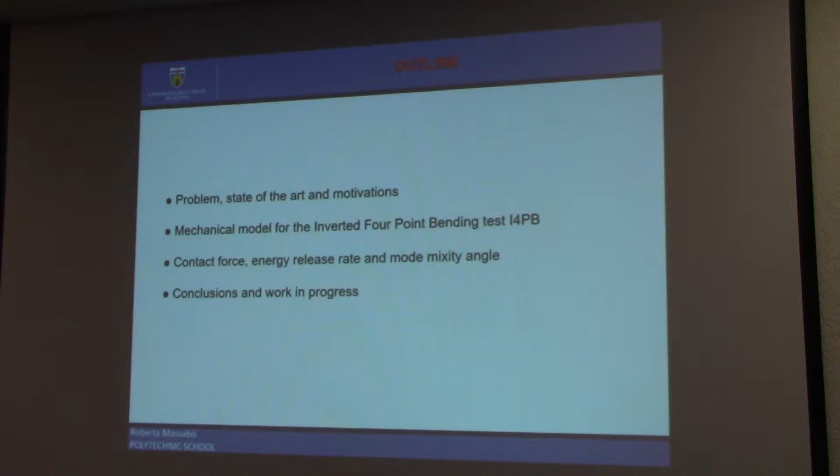So thermal barrier coatings are used in order to protect and reduce the temperature of the underlying metal alloys in aircraft and power generating turbines. And they're essentially a layered system with three layers. So we have the metal substrate, then we have the metal bond coat, which is usually very thin, and then we have the ceramic top coat.

And among the dominant failure modes is the failure mode by spallation, which is driven by interfacial delamination. And interfacial delamination typically grows between the three layers and under mixed mode condition, and usually with a large component of mode 2.

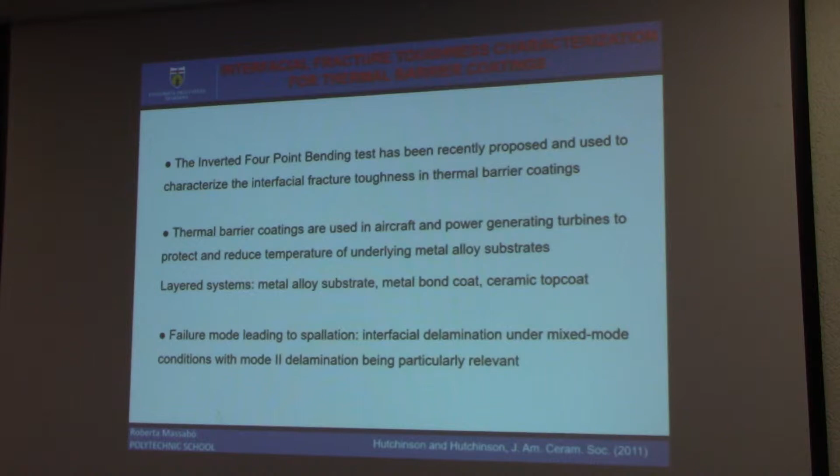Now, the inverted four-point bending test is a modification of the well-known four-point bending test, which was developed by Charalambides at Santa Barbara many years ago to measure interfacial fracture toughness in layered systems. And in this test, loads are applied this way in order to create a state of pure bending in the intact part of the specimen and in the lower delaminated arm, while the upper arm is essentially stress-free.

And the delamination in the specimen grows under steady-state condition, and the energy release rate and the mode mixity angle can be defined very easily with any methods. We applied the Suo and Hutchinson method, and they are shown here, so they do not depend on the crack length, and the mode mixity angle is around 41 degrees. So this specimen has nearly an equal mix of mode 1 and mode 2.

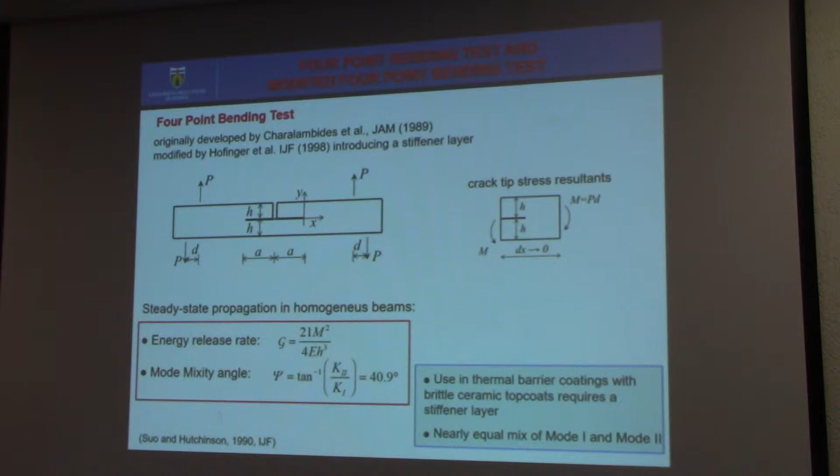It has been applied to thermal barrier coatings, but as I said, thermal delamination typically grows with a much larger mode 2 component, so it's not useful to define the fracture toughness under those conditions. So the inverted four-point bending test was suggested in a paper by Hutchinson and Hutchinson in 2011. And recently, it has been applied to thermal barrier coatings by Vaunois, a group of French researchers. And they performed experimental tests, and they also conducted finite element analysis.

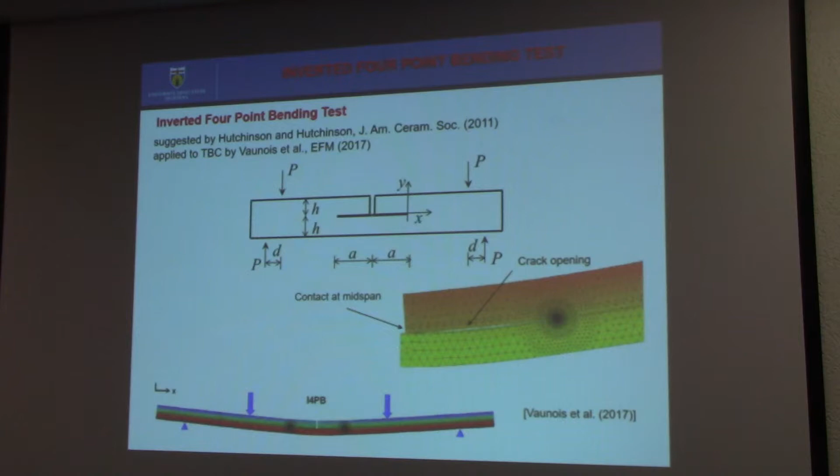Now, the idea is very simple. The loads are simply inverted in sign. And therefore, we still have a constant bending moment in the intact part of the specimen, but now the crack faces come into contact at the midspan. And from the finite element results, they observed that contact occurs only at the midspan, while the crack surfaces are open over most of the length of the crack.

And Hutchinson and Hutchinson in 2011 obtained an analytical solution for the energy release rate and the mode mixity angle. And that solution was obtained based on a number of simplifying assumptions. They assumed the specimen to be homogeneous. They neglected shear deformation. They neglected near-tip deformation, so they assumed the delaminated arms to be clamped at the crack tip cross-section. And they also assumed frictionless contact, so they neglected friction in the solution.

Now, based on this, they calculated the transverse displacement at the midspan, and imposing a compatibility condition on the transverse displacement of the two delaminated arms, they obtained the contact force. And then by applying classical methods, they defined the energy release rate and the mode mixity angle. And this solution is again a steady-state solution. Energy release rate and mode mixity angle are independent of the crack length. And the mode mixity angle is around minus 60 degrees. So you see that the mode 2 component is much larger than the mode 2 component in the regular four-point bending test.

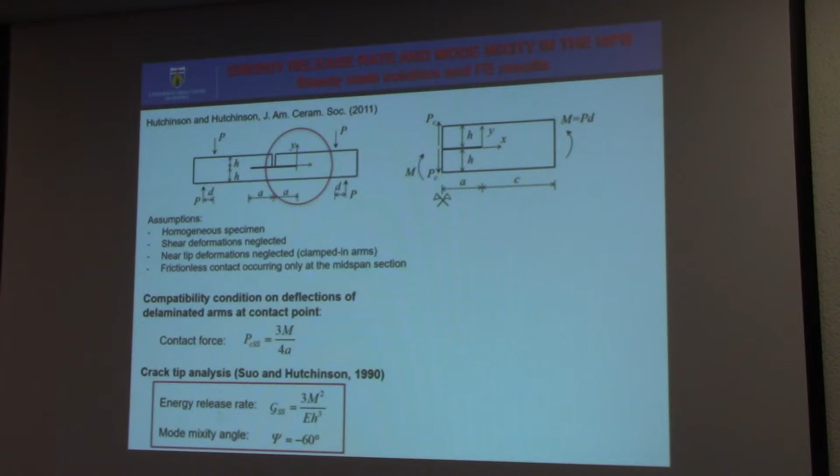They also performed some finite element calculations, and here you see the normalized energy release rate and the mode mixity angle as a function of the length of the crack. And the different curves correspond to different values. They treated the problem assuming Coulomb friction, and they considered different values of the friction coefficient.

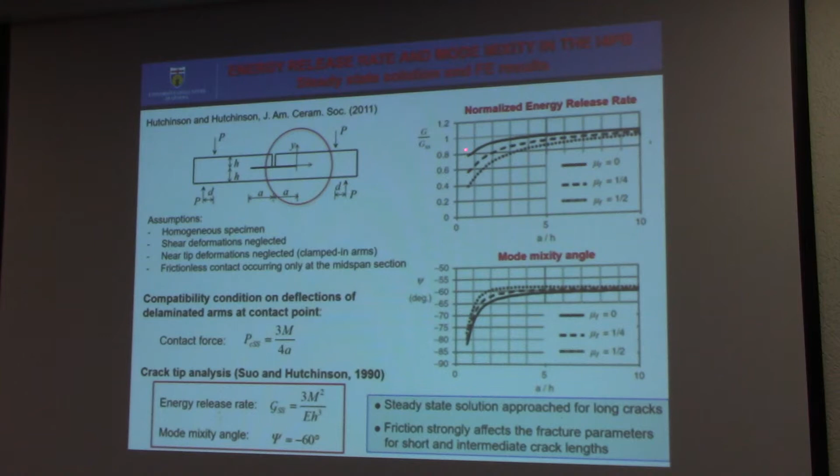And what you can see from this diagram is that it's true that the steady-state limiting solutions are approached, but these occur only for very long cracks, while the solutions for short and intermediate cracks strongly depend on the friction acting at the point of contact, and the solutions are also affected; as you can see, they differ from the steady-state solution. So our idea is to formulate a mechanical model for this specimen which accounts for all the effects that were neglected in the original solution.

So we want to account for friction effects on the fracture parameter. We want to account for shear deformations, which are important when we are dealing with short cracks. And we want to account for the near-tip deformations, which are important not only for short cracks, but also for intermediate crack lengths. So the aim is to obtain a calibration formula for the inverted four-point bending specimen, which is valid for intermediate crack lengths.

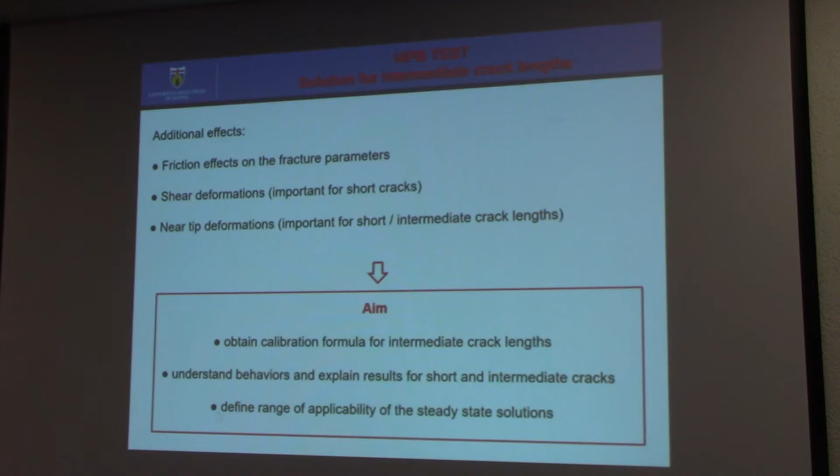And this formula, as you will see, will allow us to understand the behavior, to explain the experimental and the numerical results. And also, it will allow us to define the range of applicability of the steady-state limiting solution in order to design the experimental test in the lab so that the steady-state condition can indeed be approached in the specimen.

So regarding friction, we account for friction using a structural mechanics approximation. So essentially, we consider Coulomb friction, and these two frictional forces are then transferred to the neutral axis of the beam, plus the compensating moment. And what we found out is that the effect of friction is minimal on the contact force, while friction does have a very important effect on the fracture parameters, as we already noticed in Hutchinson's results.

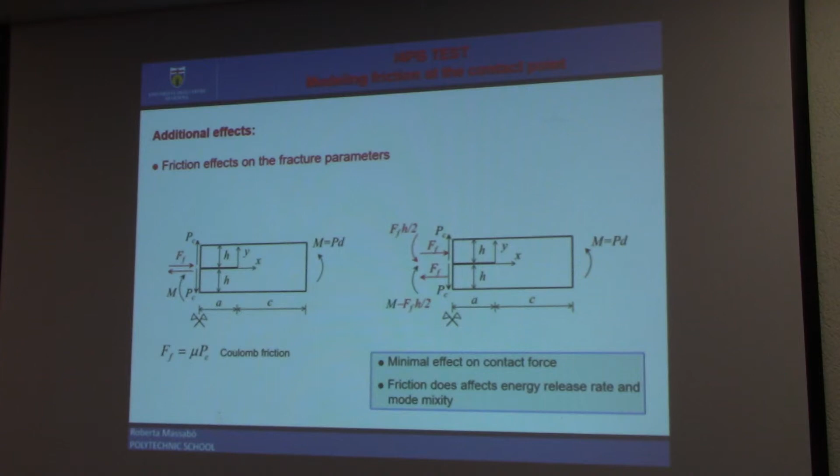For shear, we simply use the theory of a shear deformable beam to solve the problem. And for the near-tip deformation, we decided to use the concept of root rotations and root displacements. So what are the root rotations and root displacements? Root rotations are essentially relative rotations of the crack tip cross-section of the different arms of the specimen. And this relative rotation arises due to the compliance of the material ahead of the crack tip.

And if the crack is long enough, they can be defined as a linear function of the crack tip forces, moment and force resultant, through some compliance coefficients. And the values of the compliance coefficients can be found in many papers in the literature, both numerical solutions and recently also analytical solutions by Konstantin Ustinov.

The root displacements are a similar concept. So it's a relative displacement between the axis of the delaminated arm. And this is a concept which has been recently used by Thouless in a very nice paper where he compared different solutions for the double cantilever beam specimen.

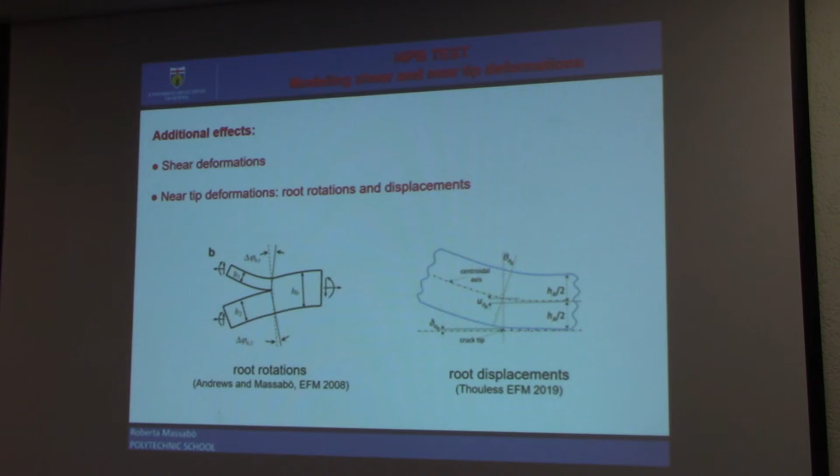Now, this is an important idea of our model, so I want to tell you a little bit more on these root rotation and root displacement coefficients. And to explain why they are useful, I will refer to the double cantilever beam test. The double cantilever beam test is a well-known test. Here you see a symmetric double cantilever beam, and I'm also assuming homogeneous and isotropic material. So this is the expression of the energy release rate for the double cantilever beam, homogeneous and isotropic. You probably have seen this expression.

And you can see that here in brackets we have this term which is squared. Now, if we apply the J integral and we introduce shear deformation, root rotation, and root displacement coefficients in our solution, we can explain this term and separate all the different contributions. So the first important contribution is bending of the delaminated arms, and this is the dominant contribution. It goes with the crack length squared.

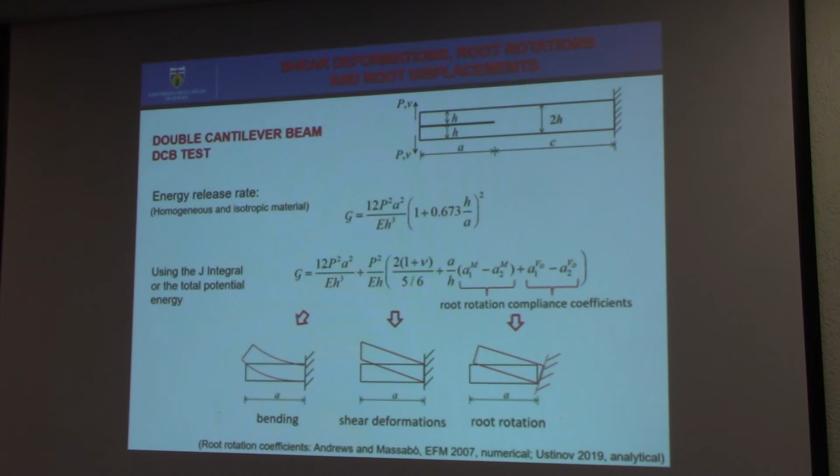But then we have a contribution from shear deformation along the beam, and then we have two additional contributions which are due to these localized root rotations. And we have root rotation produced by the bending moment at the crack tip and root rotation produced by the shear forces at the crack tip. And these coefficients, as I said, can be found in the literature. They've been tabulated for different material systems and different positions of the crack. So we can now use them with confidence. And as I said, they've also been verified analytically recently by Konstantin Ustinov.

We can also use a different approach to calculate the energy release rate. We can use the compliance method. And the compliance is the transverse displacement here due to a unit load. If you apply the compliance method to define G, then we can separate again all the different contributions, and we will see the effect also of the root displacement, which needs to be taken into account in the solution if

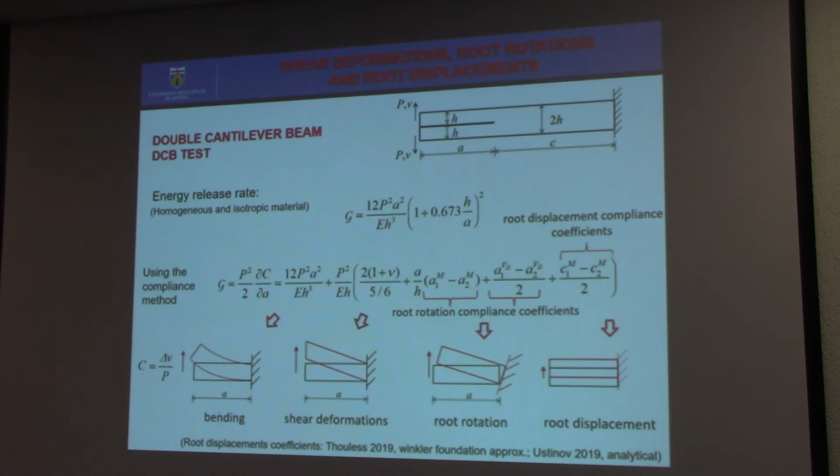we use this method. And these coefficients cannot be found in the literature, so what we did to calculate the root displacement was to assume that this material here can be treated as a shear deformable beam on a Winkler foundation. And by doing that, we were able to obtain this compliance coefficient. So we decided to apply this approach to our inverted 4-point bending test.

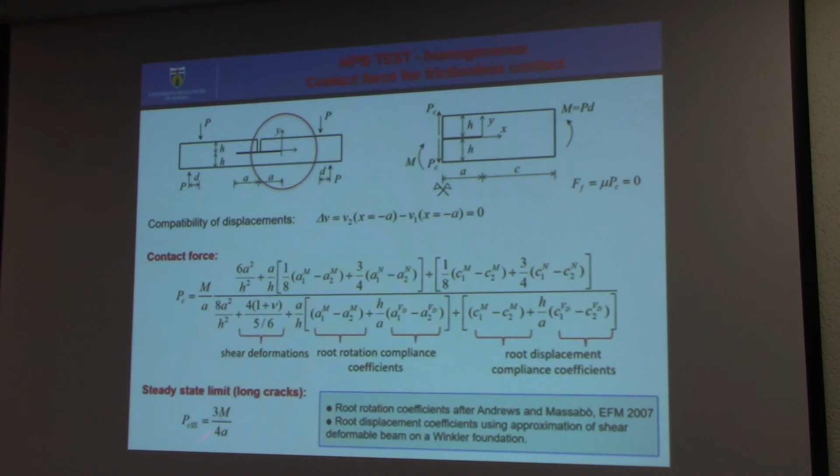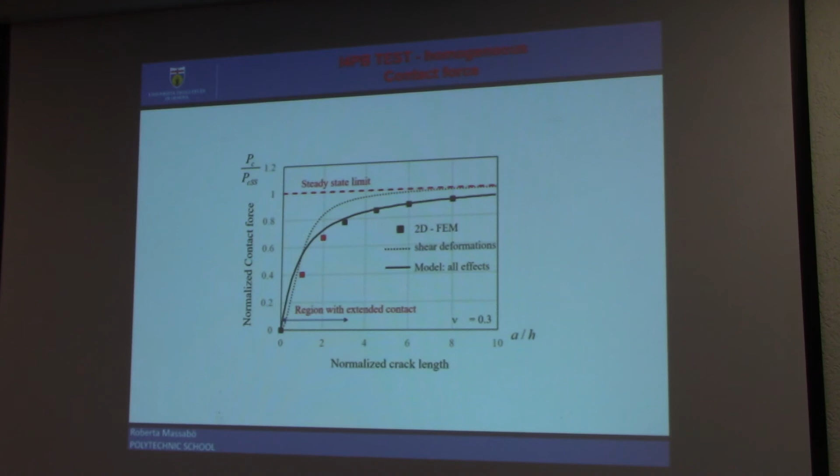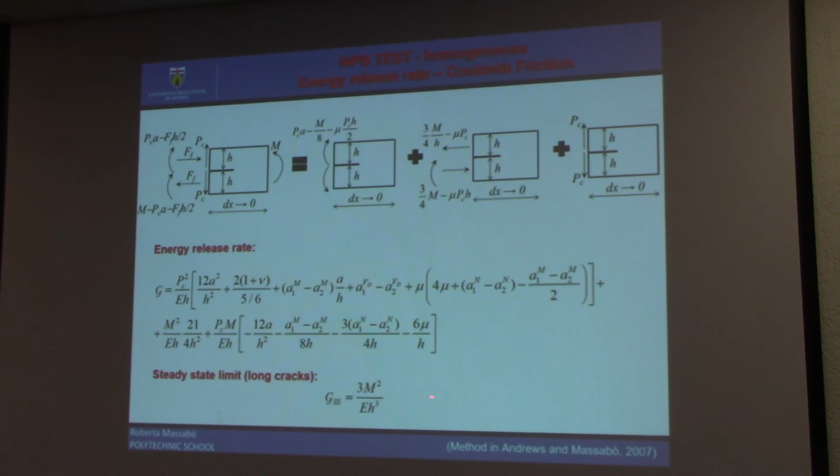Then we can apply the technique to calculate the energy release rate. What we did, we applied the methodology originally proposed by Suo and Hutchinson that was modified by Thouless and by Andrews and myself to account also for the presence of shear. And we were able to define this analytical expression for the energy release rate, which depends on the applied loading, on the contact force, on the geometry, and on all the compliance coefficients for root rotation and root displacement. And again, when the crack is long enough, we are approaching the steady-state limiting solution.

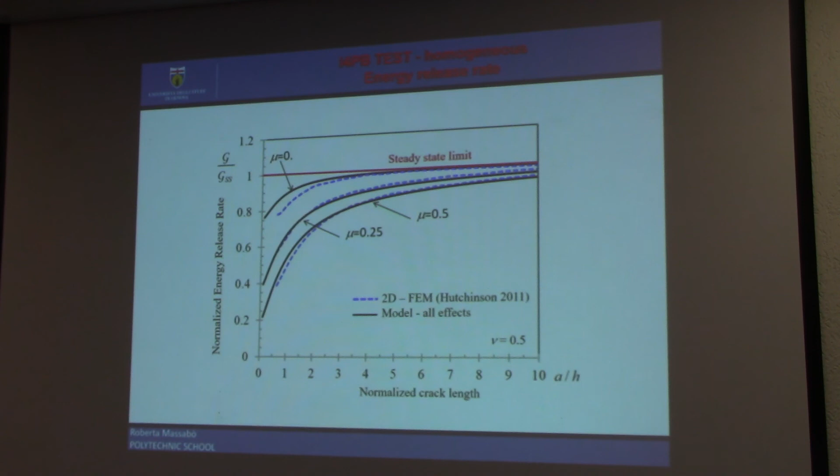You can also see by looking at this diagram that the steady-state limiting solution is approached only for very long crack length, and therefore the idea is that you can use this theoretical model in order to define the proper geometry to use in the lab if you want to propagate the crack under steady-state condition. We also obtained some results for the phase angle, but due to the lack of time and the fact that we are still not sure about those results, I just go to my conclusions.

So we formulated a mathematical model for the inverted 4-point bending test, and the idea is to account for shear deformation, for root rotation and root displacement, which describe the near-tip deformation ahead of the crack tip. We account for friction at the contact point. We noticed that for long cracks, the fracture parameters indeed approach the steady-state limiting solution, but for shorter intermediate cracks, the effect of near-tip deformation and friction are very important. The model can be used to understand the behaviors, to explain experimental and numerical results, and to define the range of applicability of the steady-state solution.